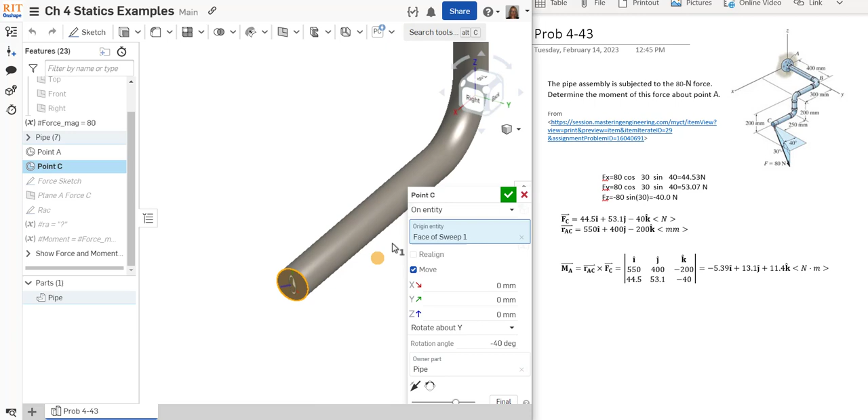Out here at point C, I added a mate connector, and it's been rotated relative to the end of the pipe. Might be easier to see from the top view, okay, how that's been rotated 40 degrees. And that's going to allow us to sketch the projection. That's going to take care of that 40-degree projection for us. Okay.

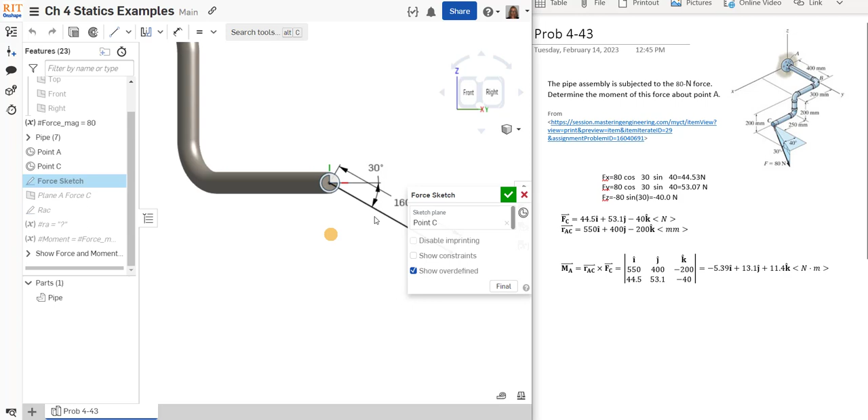So this force is sketched on that mate connector. And here is the 30 degrees below horizontal. And I've used my variable of the force magnitude, and I multiplied it by 2 millimeters. The 80 was pretty small relative to the millimeters, but I'm building everything off of the variable.

Therefore, when I calculate my moment, it'll be off of the 80 rather than the length of this line. So this is a scaled representation on this sketch here of where that force is.

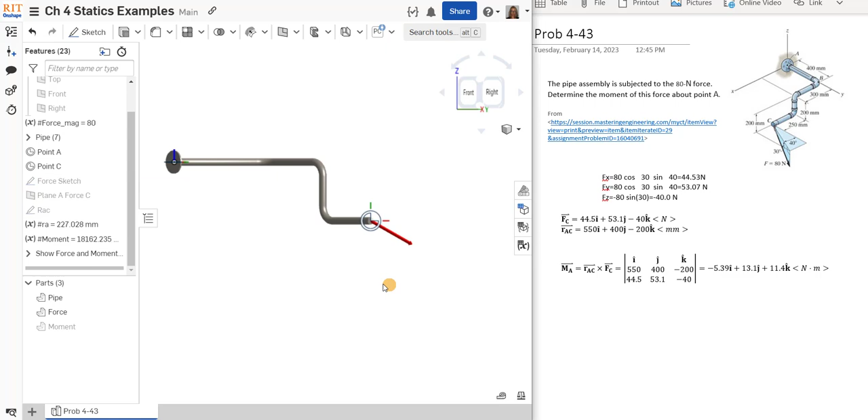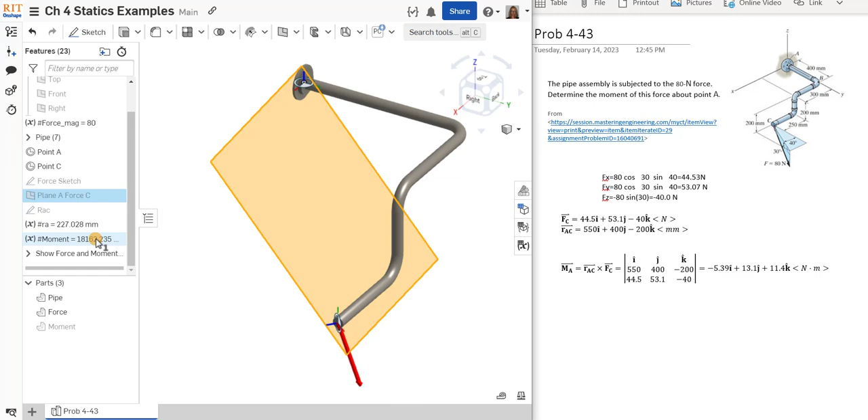And then with this force sketched at the end on point C, I create a plane, and this plane has both ends of the force, and it contains point A where the moment's being drawn around. So this is the plane that'll contain the position vector from A to C. So on this plane, let's show our force. There's our force. Okay. So here's the force at C.

Technically, the position vector goes straight from A to C. This is my position vector. One way of calculating the magnitude of the moment would be R times F times the sine of the angle between them. So it'd be very easy here to add that angle on and get that piece of information if that was something we needed or wanted to use, RF sine theta.

Another way to use this sketch is, using the principle of transmissibility, I can take my force and translate it parallel over and draw the perpendicular distance from the moment point to the force. So remember, this plane that we're looking at is not horizontal, it's not vertical. It's a plane that contains the force vector and it contains the moment point. And in this plane, I can draw the perpendicular distance from the point to the force vector. And I can determine this perpendicular distance from point A to the force.

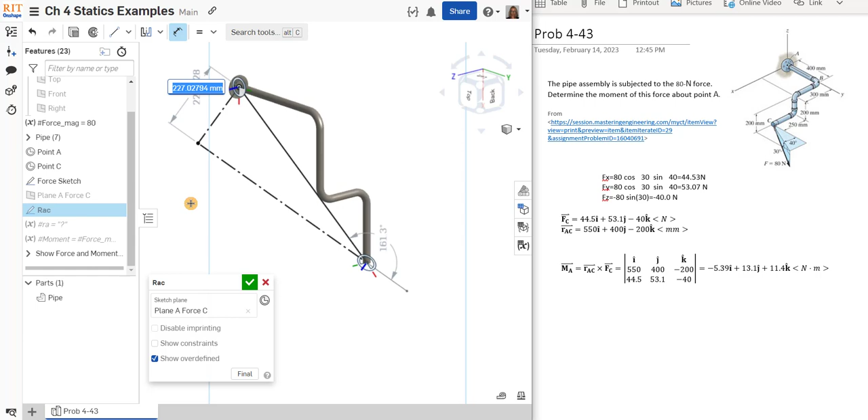And that's what we've done. We've drawn this sketch and we've gotten this perpendicular distance and created a variable based on what I call the radius about A, but the perpendicular distance to the force. Okay.

So if I take the magnitude of my force, 80, and I multiply it by that perpendicular distance, we do get the moment. So the moment here has been calculated as 18,000 Newton millimeters or 18 Newton meters about point A. So that still doesn't quite explain what does that mean? What does that value mean? How does this vector form get there?

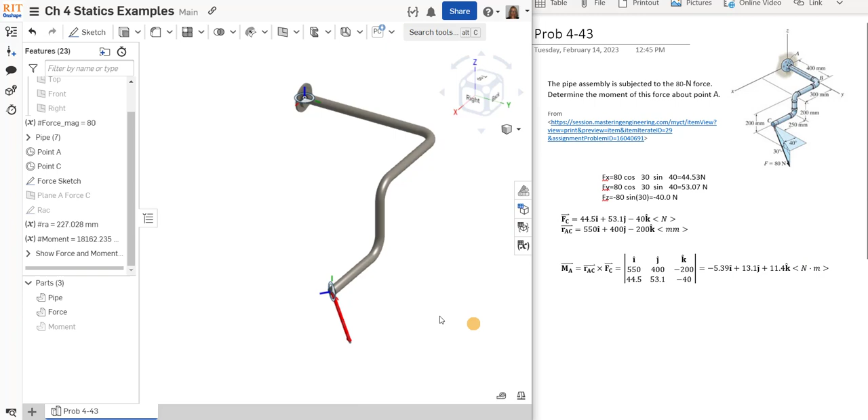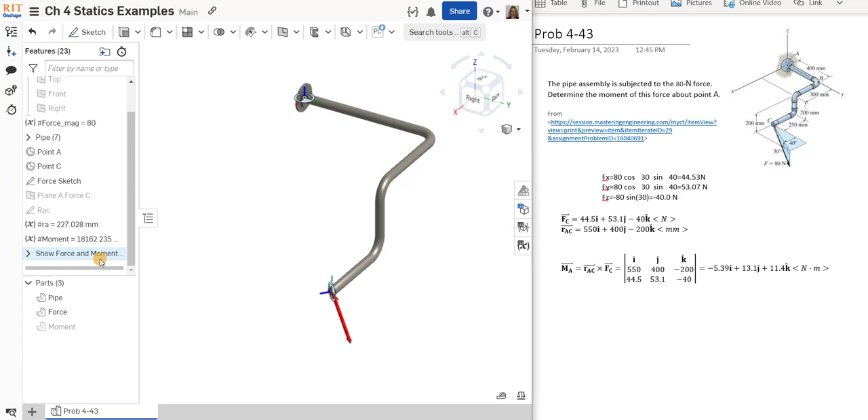And just showing you that moment calculation here. We've got the force magnitude times that perpendicular distance, RA. All right. So to really picture what is happening, we've got our force, we've got our position vector, both in vector form and as the perpendicular distance.

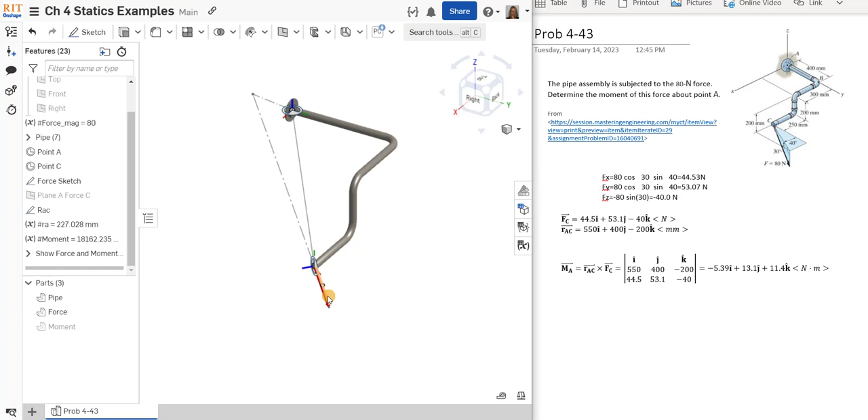The moment is going to be perpendicular to both the position vector and to the force vector. So in this plane, which contains them both, we can actually create our sketch and extrude perpendicular to this. Let's turn off my mate connectors for a moment. Okay. All right.

So here we've got the bent pipe. We've got the force applied down here at the end. And this green line is showing my moment axis. Now remember that moments are rotational. So this is the line that it would spin around. And it would have a length of 18 Newton meters, I'm scaling lengths to rotation. But this is the axis it would spin around.

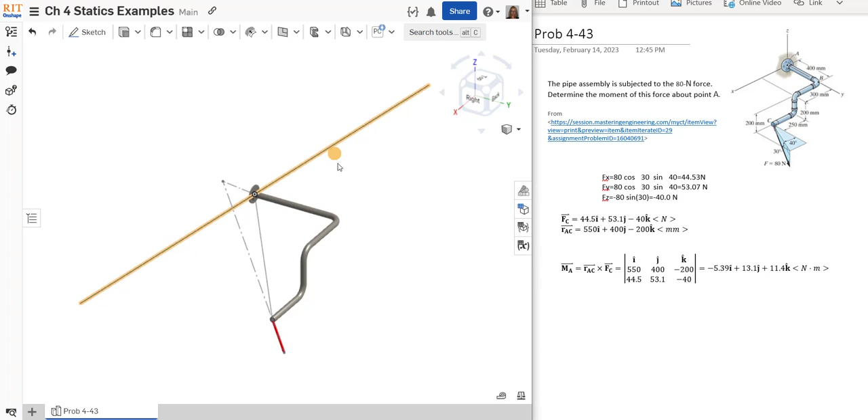So let's look at this kind of spinning around this pipe. If I look at it in the top view, my force is going to spin, cause some rotation. Remember, this is my perpendicular distance to the force. So that force causes, I'm really not getting a lot from the top view, to be honest. Okay, let's look at,

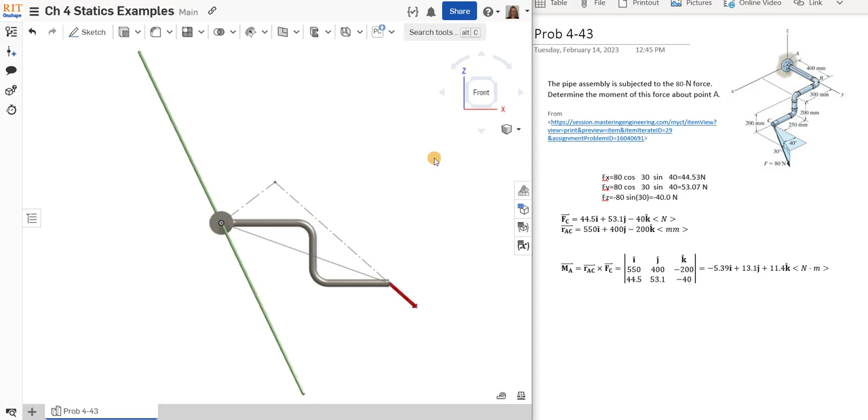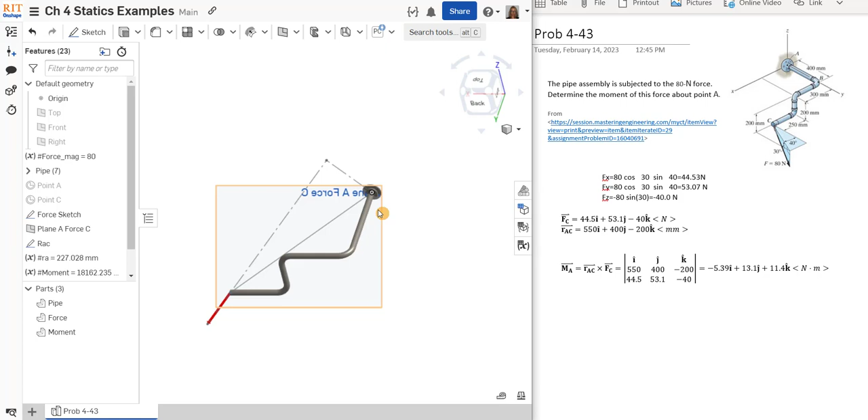yeah, it really is challenging to quite grasp the 3D-ness happening here. But if I look at that plane that I sketched, this is the force, that is the full force, I'm looking straight down on it, and this is the perpendicular distance, I don't see that moment at all. The moment is totally perpendicular to that plane.

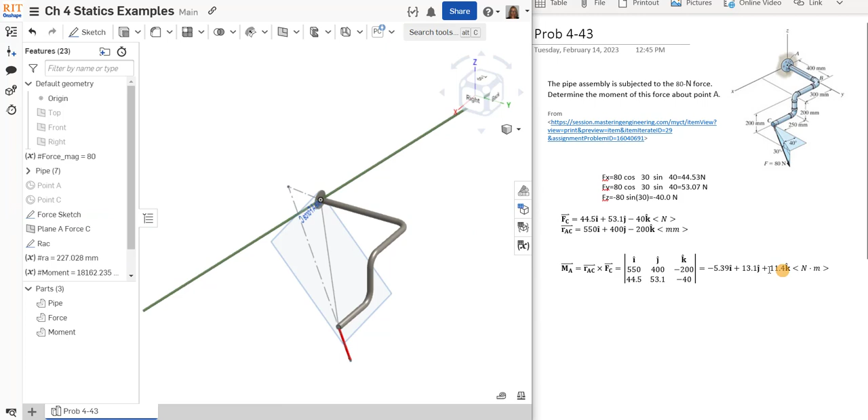So when I look more at the side here of the rotation, or maybe more like this, the force is tending to cause the rotation around this axis. Now, I offered to demonstrate how I can get these values on Onshape here.

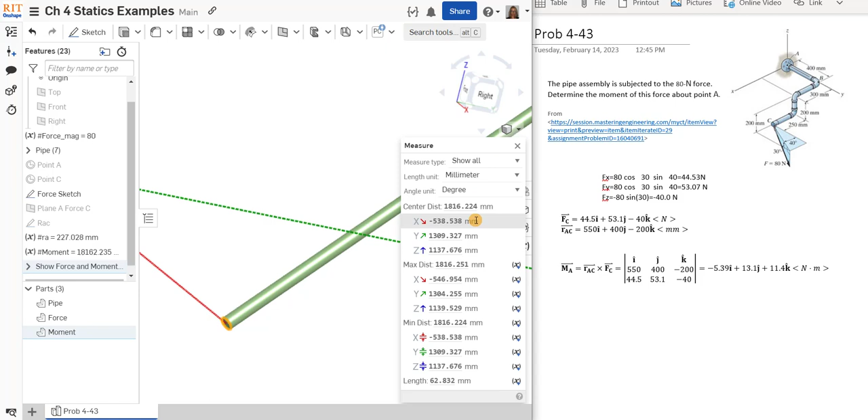And again, we can use the measurement details. I'm just going to go to the end of the moment and come over here to this end of the moment and look at my measurement details. And I can see that I have this. Actually, let's zoom this back out. Okay. So this moment has the -5. Now notice I'm off by a factor of 100.

I've done some scaling to make it more visible or appropriate for the Onshape display, but I can confirm my X value, 5.39 in the negative X component. And then the Y value is positive 13.1 and the Z value is positive 11.4.

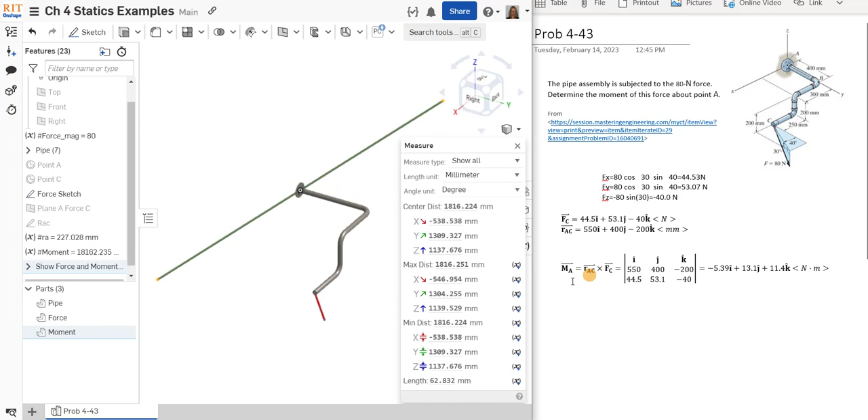So I could resolve this moment into those three components of a negative X component, positive Y component, and a positive Z component. And those values, while I have done some scaling to make it fit the display model, do end up getting us the same values for the moment about A.

So I hope that helps us visualize the relationship between the force and the position vector and the perpendicular distance and the moment. Another way, maybe this is a great way to see it.

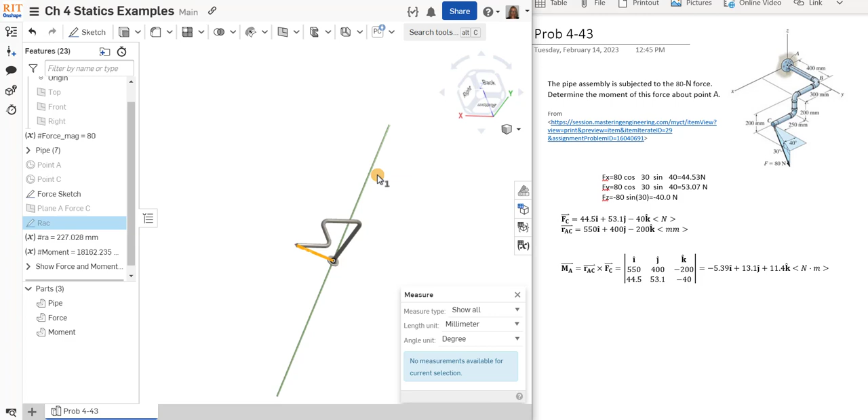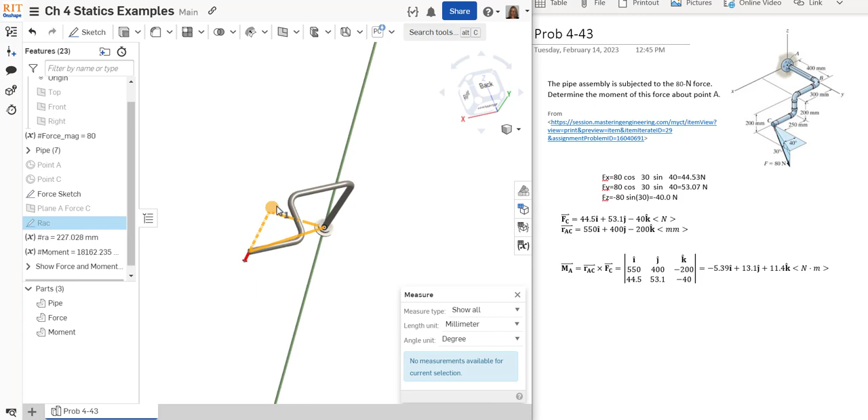Another way I've thought of visualizing the moment and why it's R cross F: if I think of R as the radius of a circle, and here's my force, essentially there's a circle around here that force could be applied around, tending to twist around. Okay. That force times that radius would give us what I've demonstrated as the length of this moment.

Okay. But think of R as like a radius of a circle that we can spin around a point, causing rotation. I hope that helps.